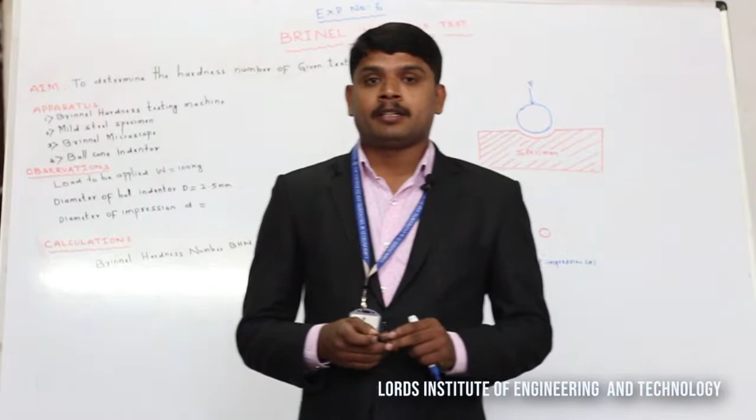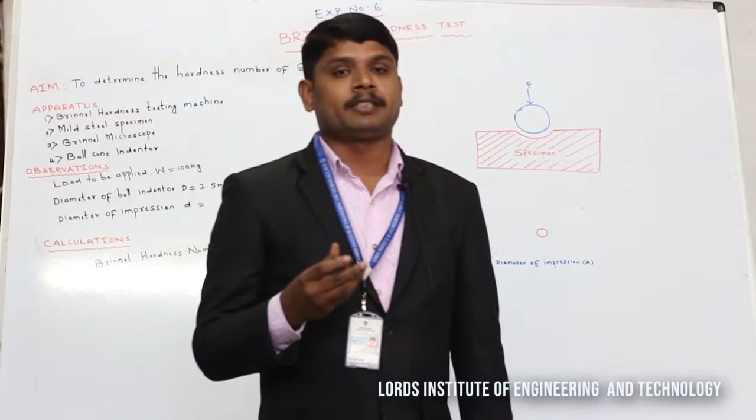Brinell hardness test. The main aim of this experiment is to find out the hardness number for the given test specimen. Specimens may be of different types, different materials, so we need to find out the hardness for the given material.

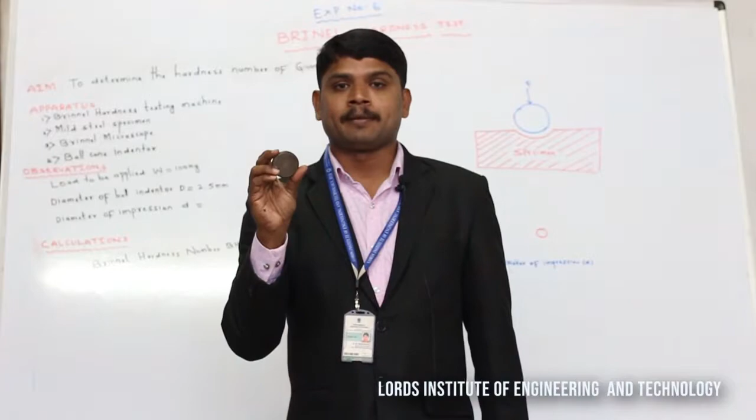Now we are taking a mild steel specimen, and we are going to test the hardness number for the given specimen.

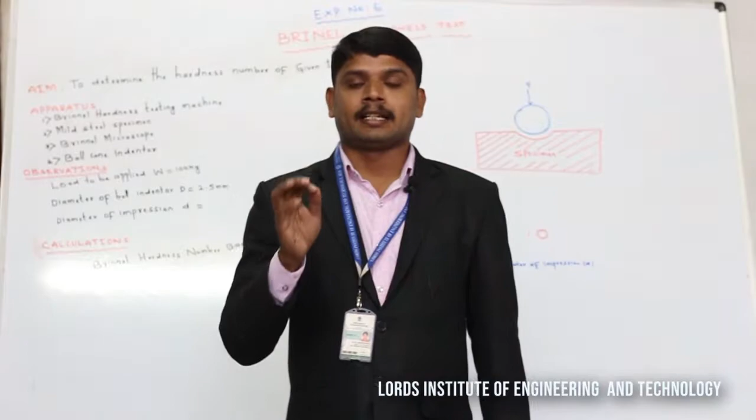First of all, we should know what is hardness. Hardness is the resistance to scratch, indentation or penetration. How much resistance is offered by this body against the indentation, that is called hardness.

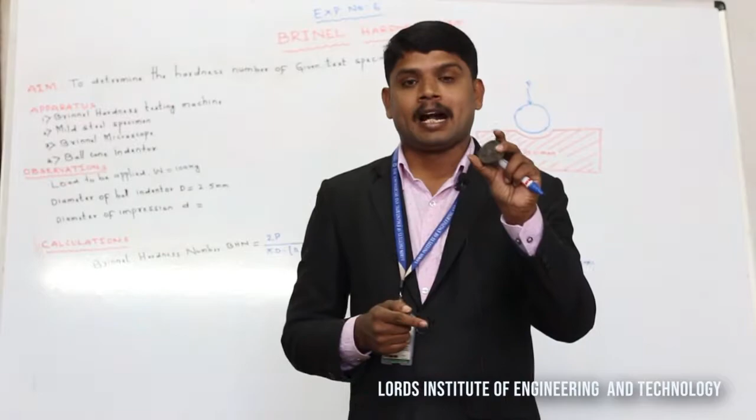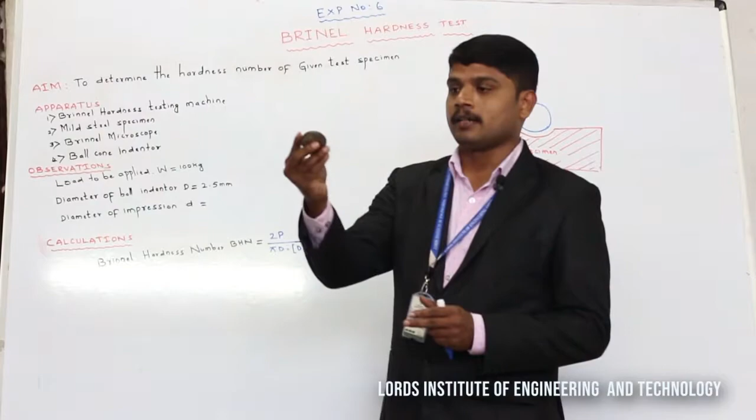So for finding the hardness, first of all we will use the equipment - Brinell hardness testing machine - and the specimen is given to perform the test.

To perform this experiment, we are using a ball indenter. This is a ball cone indenter. In this ball cone indenter, we are placing a ball whose diameter is equal to 2.5 mm. The ball is a lead shot, spherical one, whose diameter is equal to 2.5 mm.

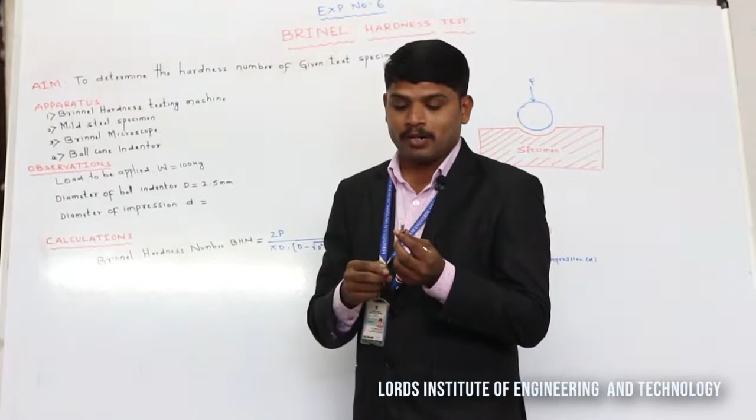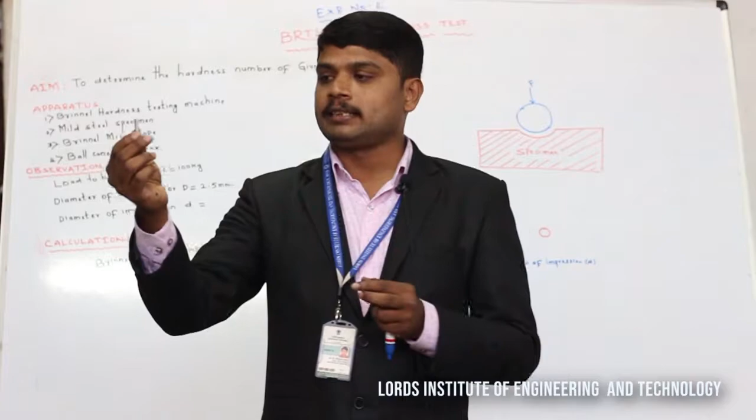Now we are fixing this ball cone indenter in a holder, then we are placing the specimen, and then we are applying the load in terms of kilograms.

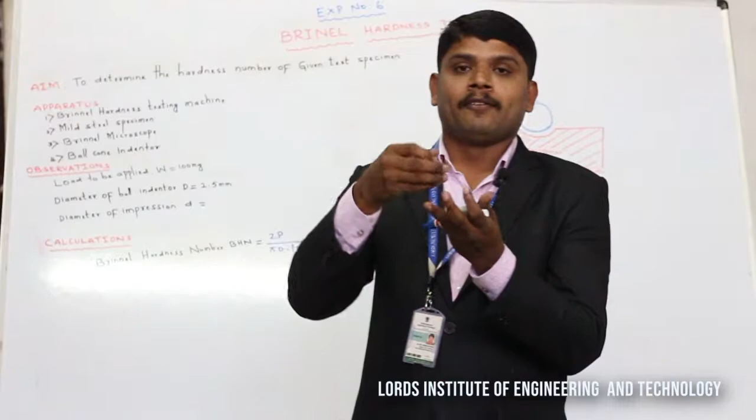After applying a load, we will get the impression of this ball over this specimen. That impression we can call indentation, and we can find out the diameter of the indentation.

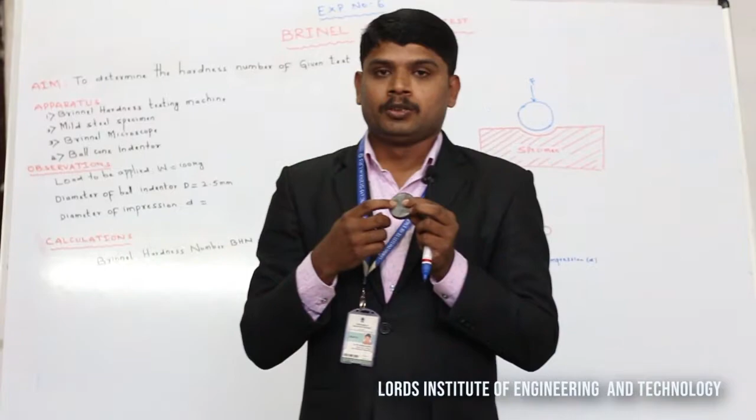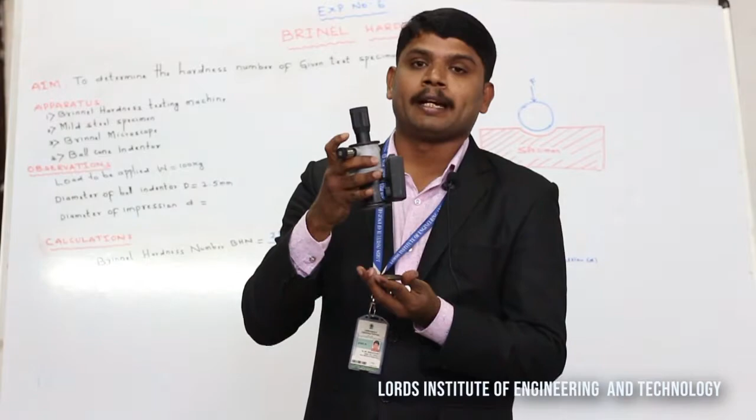We have a device called the Brinell microscope. What we will do is place this Brinell microscope and find out the length or diameter of this given impression.

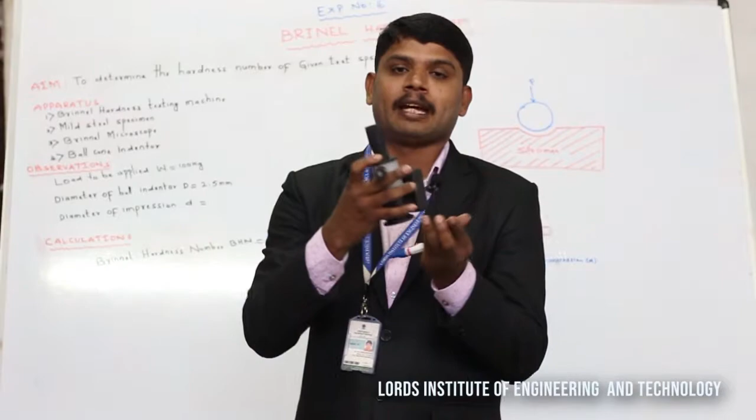After doing the test, we will get the impression. The same impression can be found out by using the Brinell microscope.

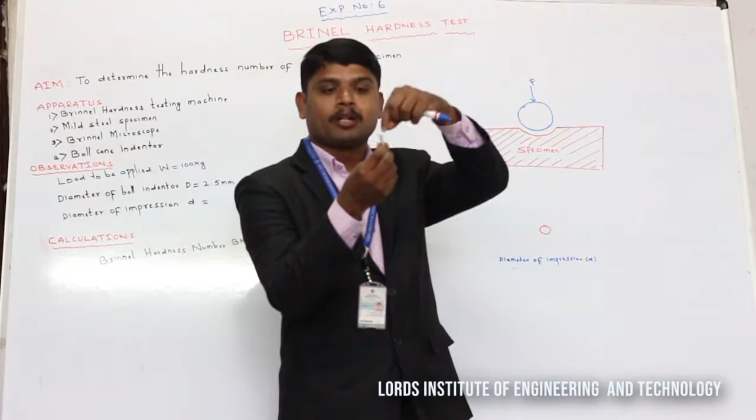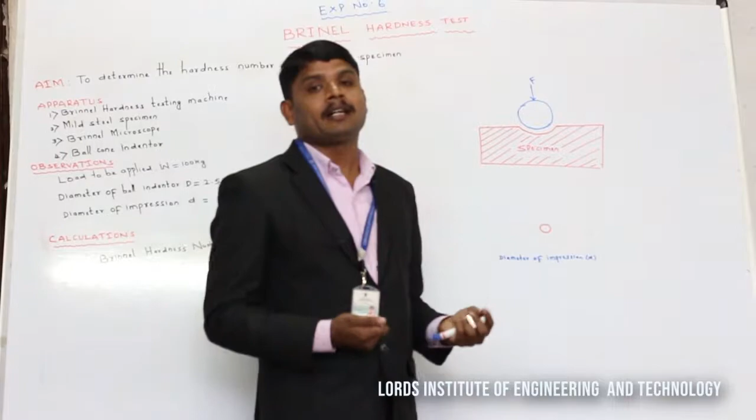Here, this is a ball which is kept in a ball cone indenter. Then we are applying a load. When we apply the load, this ball exerts pressure or force over the specimen, and when the specimen receives the force, there is an indentation.

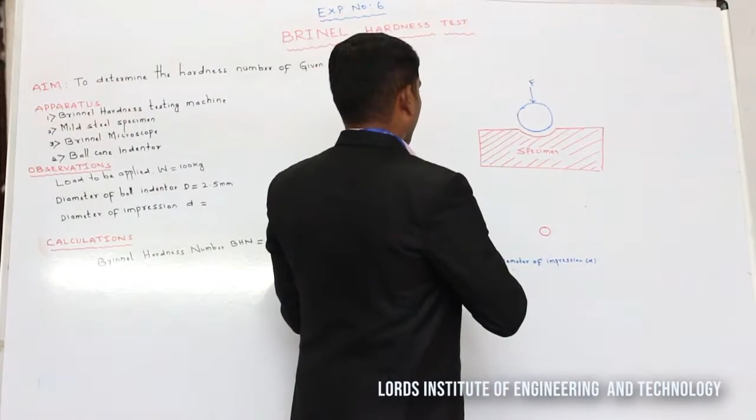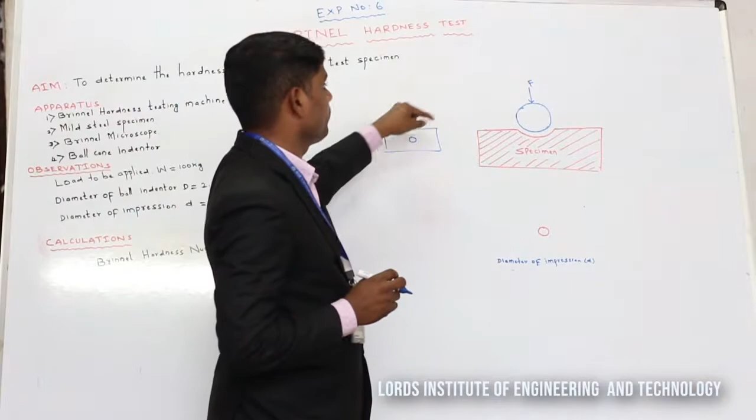So you can say there is a hole - a penetration will be there. One small hole will be induced because of this pressure. Now our aim is to find out the diameter of this impression.

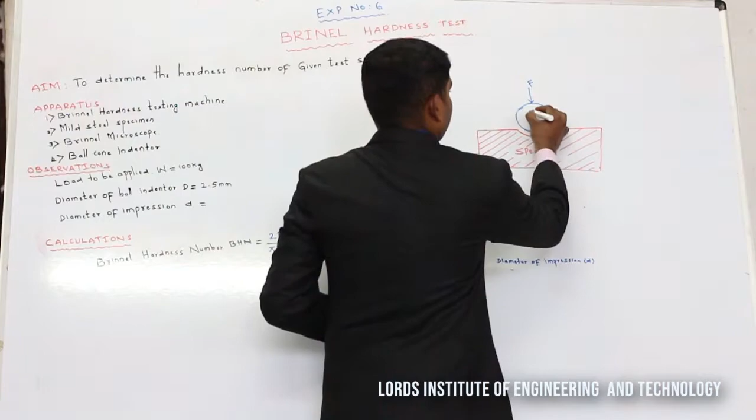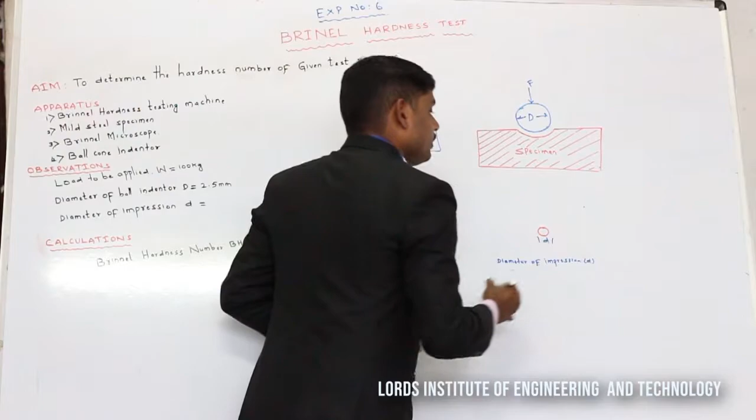First of all, we should know - the diameter of the ball we represent by capital D, and the diameter of the impression is indicated by small d. Now by using this experiment, we are going to find out the hardness of the given specimen.

Now we will perform the experiment. This is a Brinell hardness testing machine. First of all, we should know the different components of the Brinell hardness testing machine.

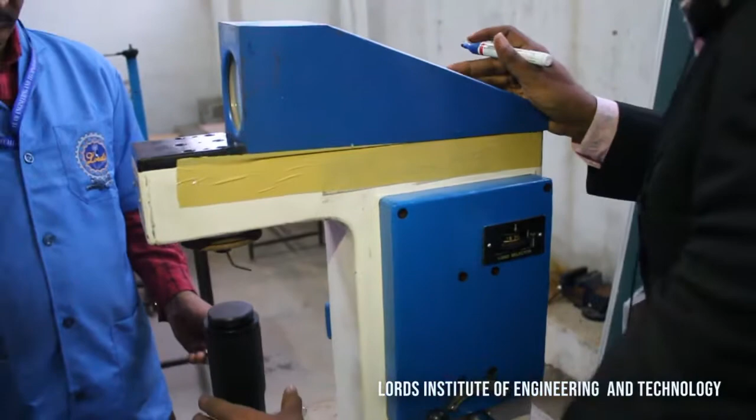This is a table, which can be raised up and down by rotating this disc.

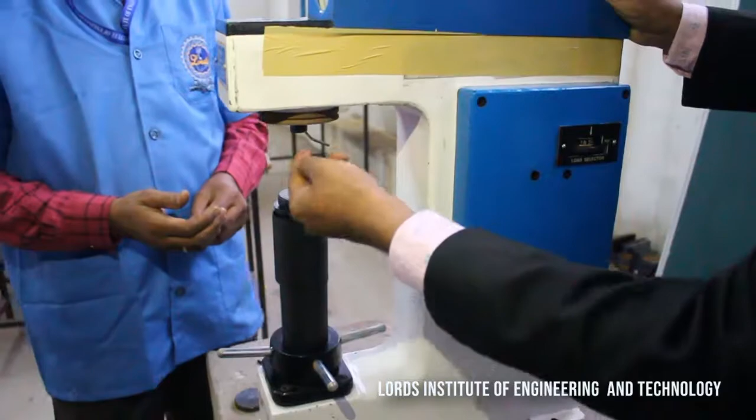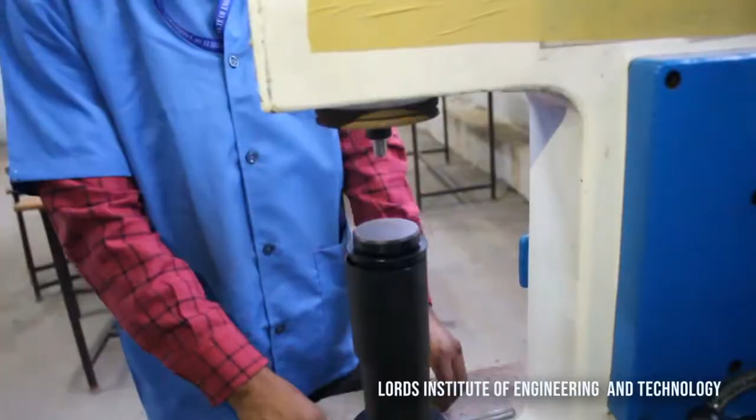First of all, we will place the ball cone indenter. Now we are placing a ball cone indenter, and by using Allen keys, we are tightening the given ball cone indenter. This is called a lever.

This is for applying the load - loading or unloading purposes.

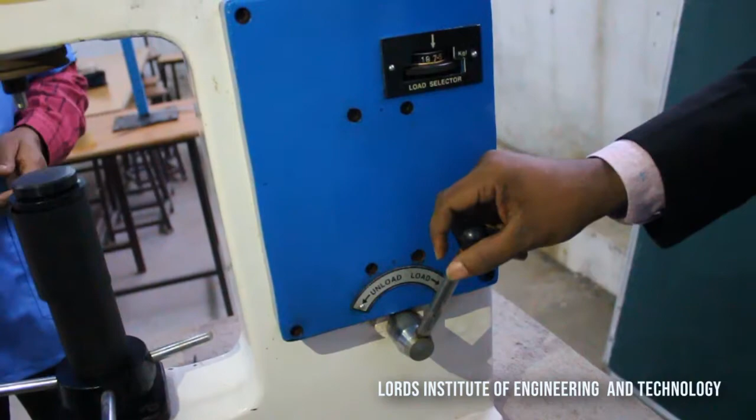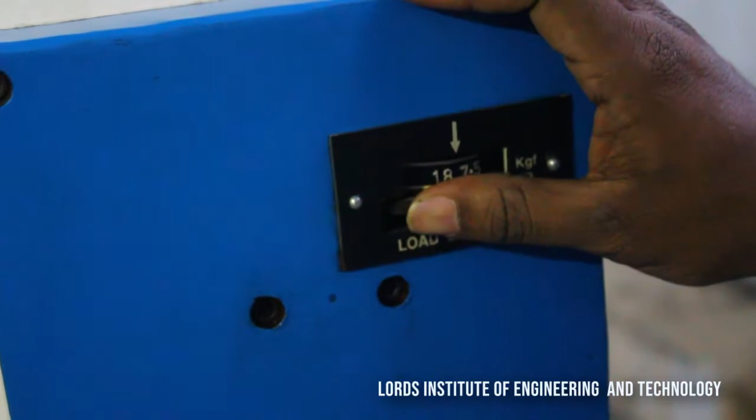Now this is a load selector. We can select the load depending upon our material. So now we are setting this load to 187.5.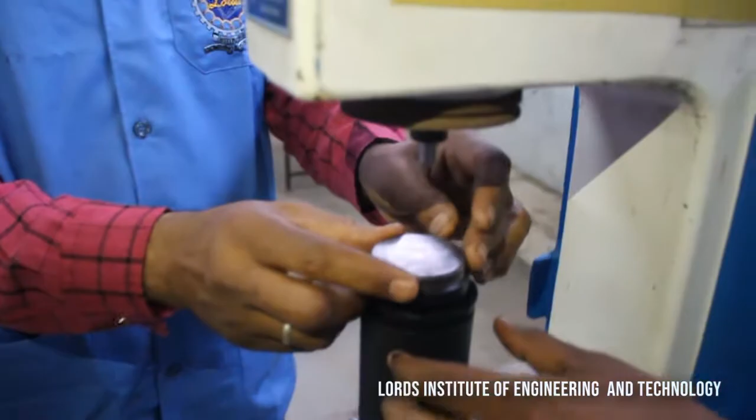First of all, what we will do is place the specimen - this is the test specimen - we are placing it over this table, and we are rotating this disc.

Due to the rotation of this disc, the table is raising. We are raising this table unless and until it touches the ball cone indenter.

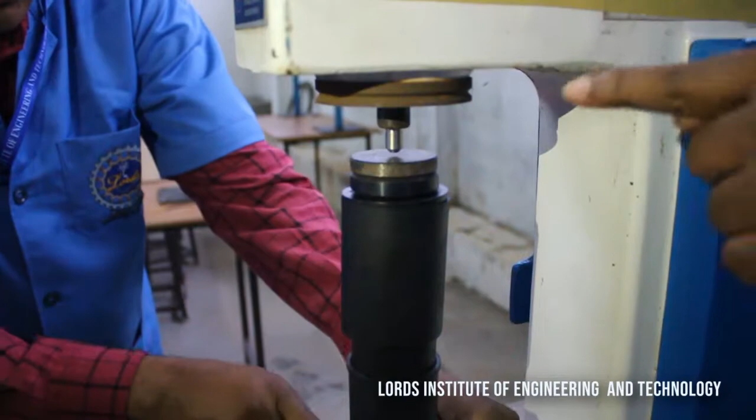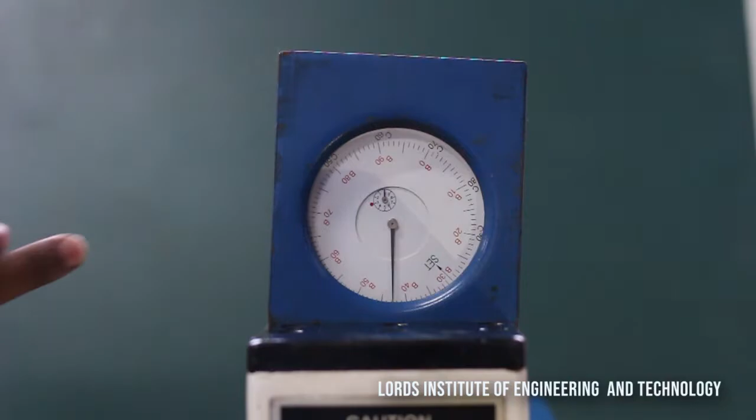When this ball cone indenter touches this specimen, you can observe the dial indicator. This is for finding the depth of penetration. So this scale is for finding the depth of penetration. Now for the scale, we have to choose the red one.

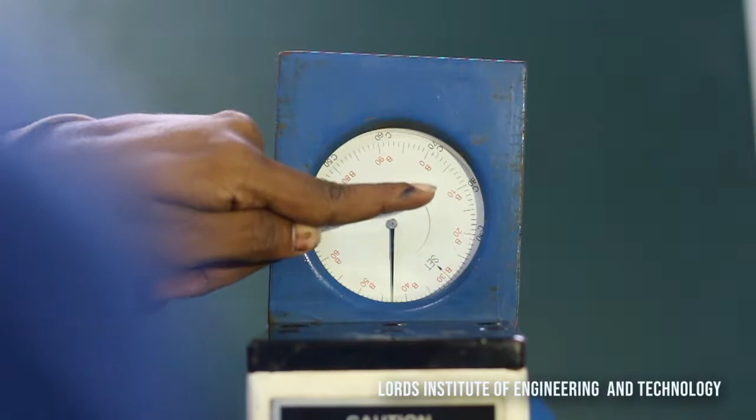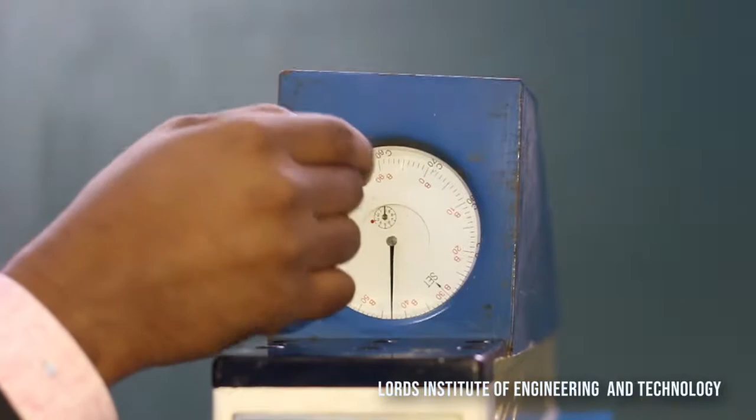It shows B, 0B, 10B, 20B, 30B like this. When the large pointer completes one complete revolution, the small pointer will move one division. When the large pointer completes two revolutions, the small pointer will move to the next position.

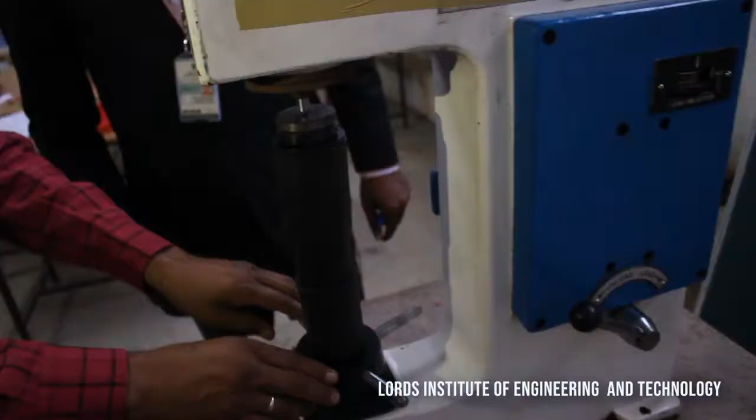So in this case, what do we do? First of all, we are raising the table. When the indenter touches the specimen, what happens? We will see there is a movement of this large pointer. Now, before applying the load, we have to see the position of the small pointer and the position of the large pointer. Here the small pointer is on 0 and the large pointer is also on 0.

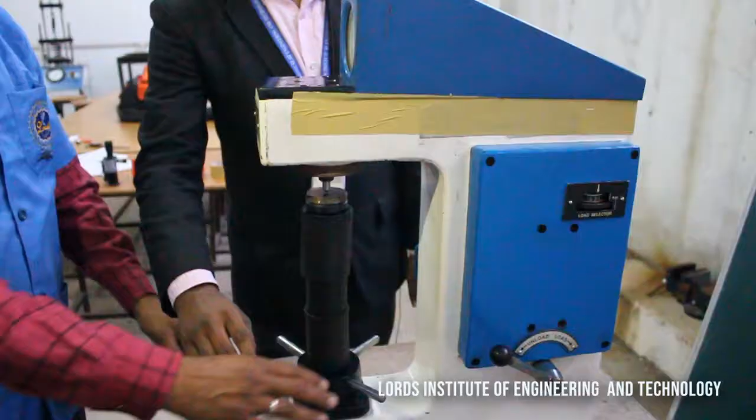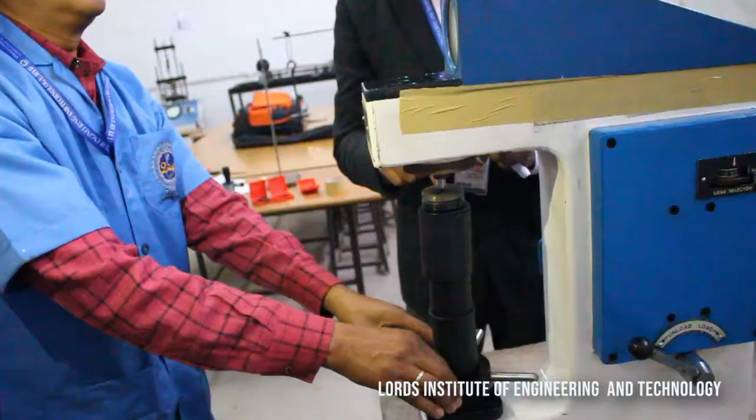Now, when this specimen touches the indenter, you will see the load is applied. The load is applied by the indenter over the specimen because of rotation of this table, or we are moving the table in the upward direction. Because of this rotation, this machine initially applies a load.

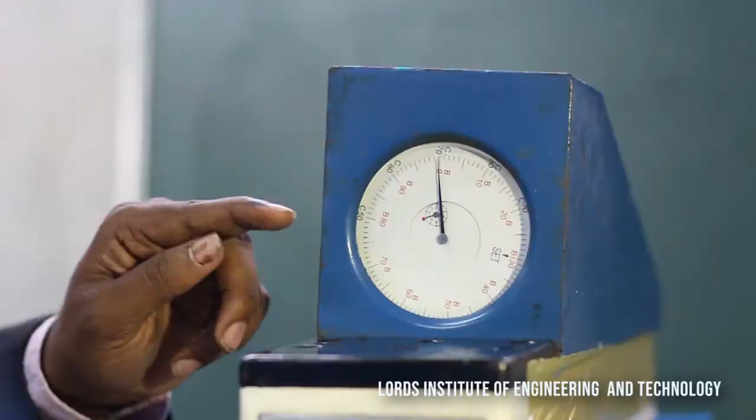Initial load has been applied. Now the small pointer is on third. It means that the large pointer has completed 3 complete revolutions.

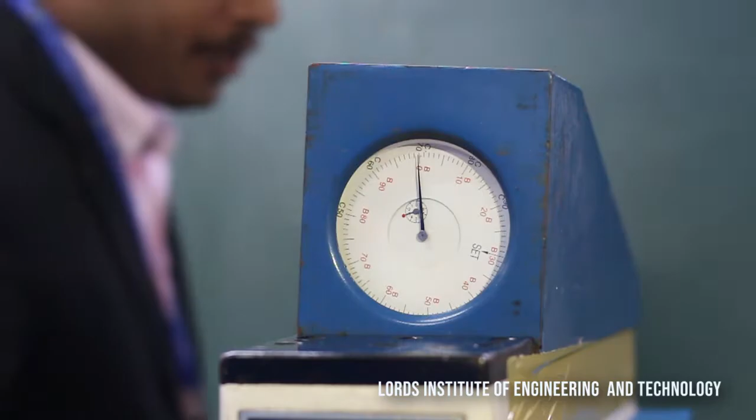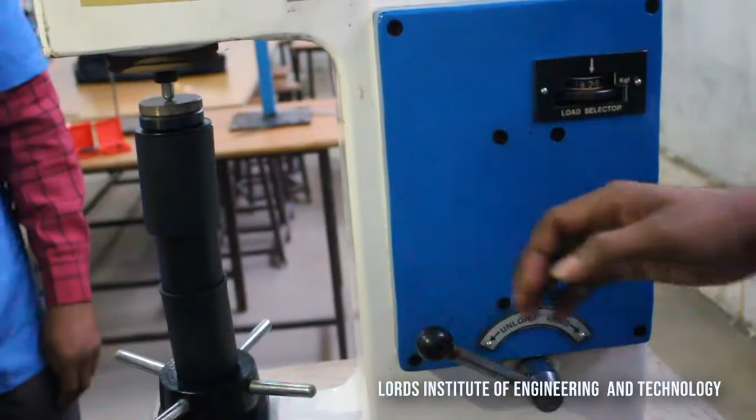Now, by using this lever, which is currently in the unloading condition, we will shift it to the loading condition, meaning we have to shift the lever to the right hand side.

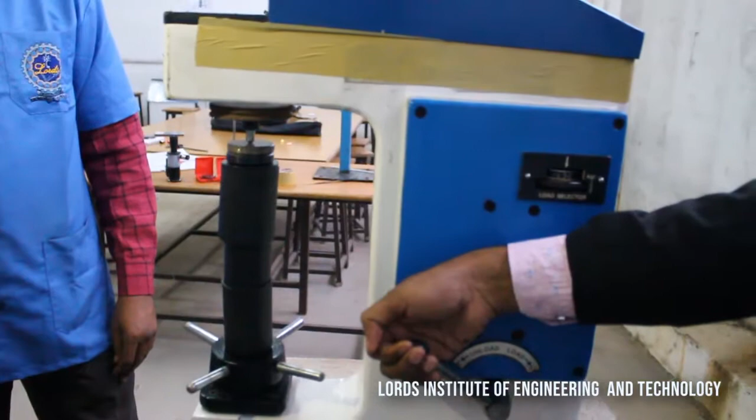Now I have set the load to 187.5. It means this machine will apply a load of 187.5 when I operate this lever. Now I will operate this lever.

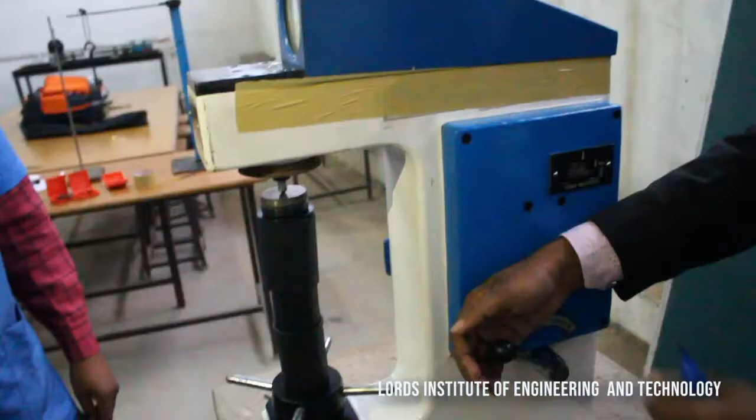When I am operating the lever, you can observe the reading on the large and small pointer. Now the small pointer is on 3. We have applied an initial load, and before applying the load we observed this. Now I am going to apply the load.

You can see here, before applying the load, the small pointer was on 3. Now after applying the load, the small pointer moves to 2 - we can say the pointer is just above 2. It means the large pointer has completed one complete revolution.

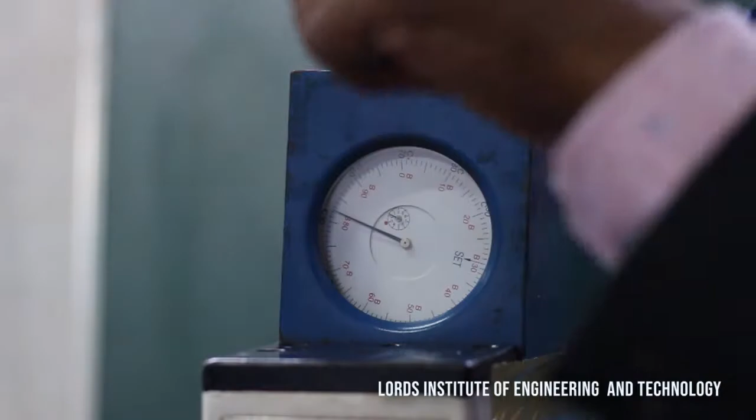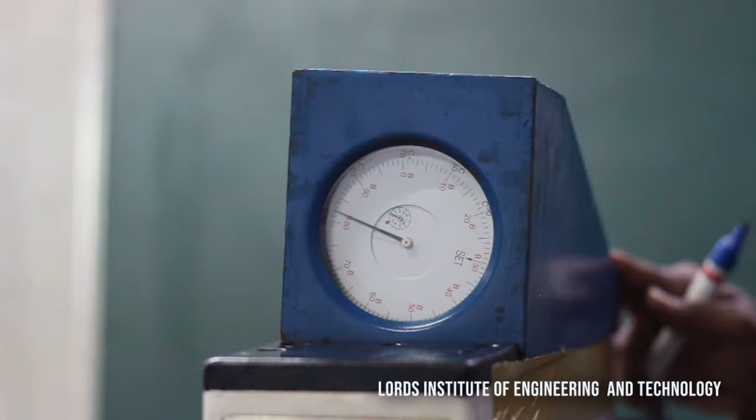It means it has completed 100 graduations. After completing 100 graduations, the large pointer is on 80. So it has completed 180 graduations - the large pointer has moved to 180 graduations.

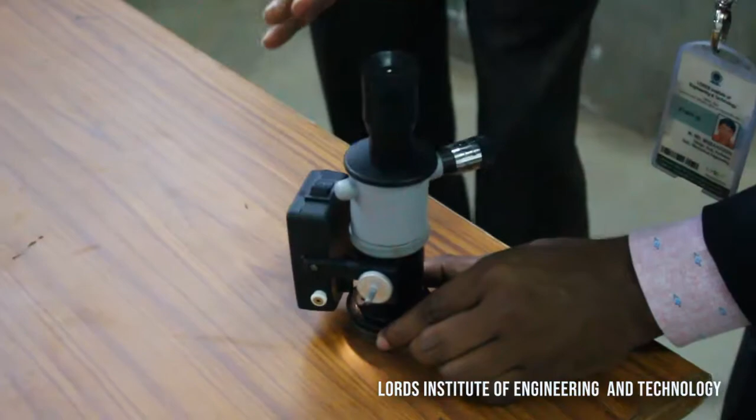Now we are placing this Brinell microscope at the place of indentation. Now I am placing the Brinell microscope. Now we will see the diameter of the given impression.

So we applied a load of 187.5 kgf. We know the diameter of the indenter is 2.5 mm. After taking the impression, the diameter of indentation is 0.8 mm.

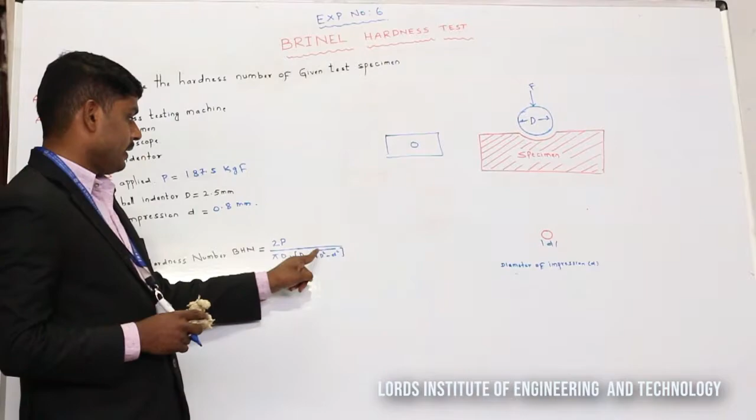The main aim of our experiment is to determine the Brinell hardness number. The Brinell hardness number can be found using the formula: 2P divided by pi into capital D times (capital D minus square root of (capital D squared minus small d squared)), where P is the load we applied, that is 187.5, capital D is the diameter of the indenter, and small d is the diameter of indentation, meaning the diameter of penetration.

Now I am going to substitute the values: 2 into P, the load we applied, 187.5, divided by pi into D, which is 2.5, into capital D, the diameter of indenter, 2.5, whole square minus small d, the diameter of impression, 0.8 square.

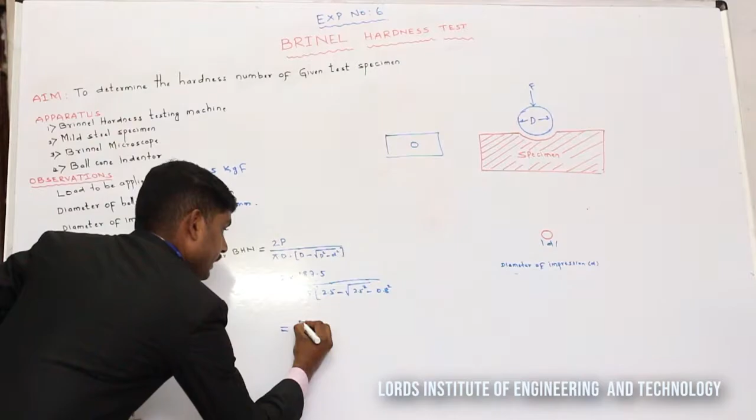Therefore we are getting 2 into 187.5, which is 375, divided by... after solving this equation we are getting 1.03244. Therefore, after solving this equation, we are getting 363.21. So this is the Brinell hardness number.

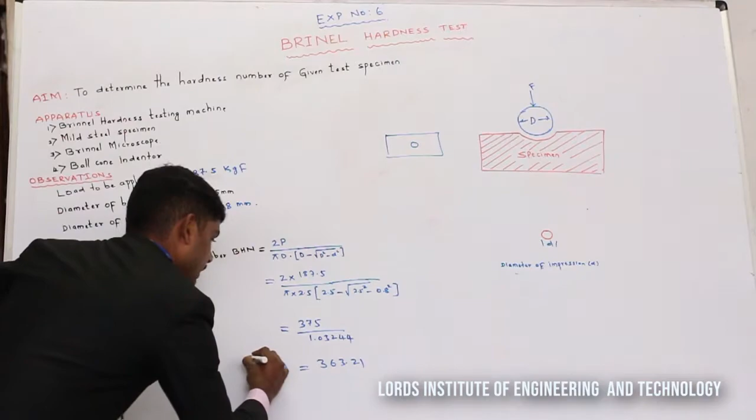The Brinell hardness number for the given specimen is 363.21.